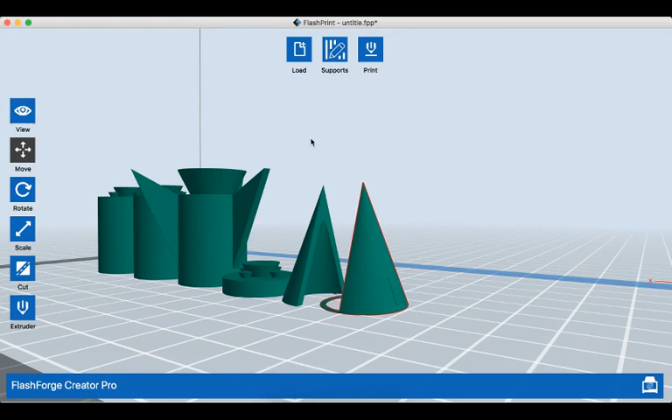In this video, I will go over how to prepare a 3D model to be 3D printed.

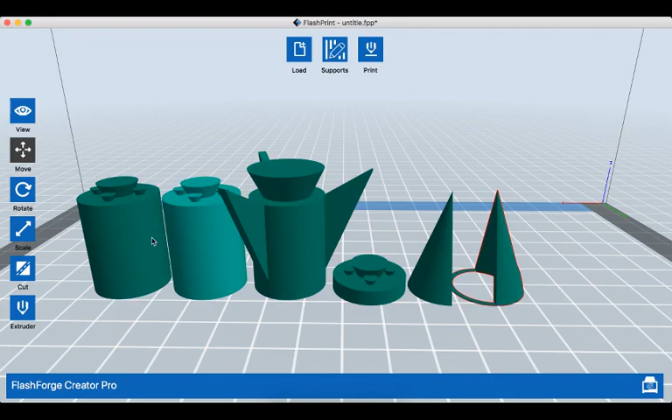So here I have this example from a student. The rocket that this person made, they have everything prepared on one scene. Usually, to be on the safe side, I have them separately, but in this case, because everything was fine, this printed out really well actually.

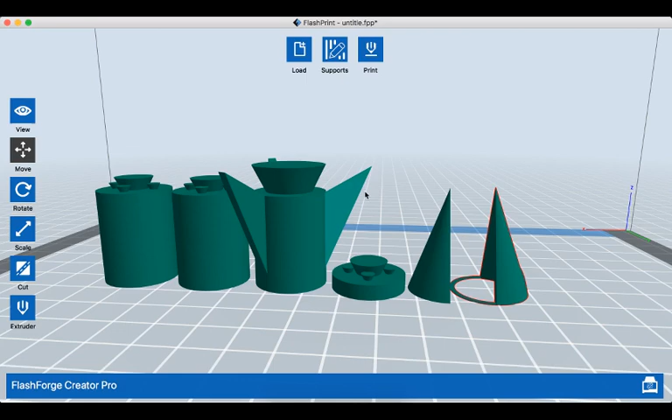Normally, something like this wing would require support, because it prints from the bottom going up, and as it prints it will fall or break off or tip over, since it has nothing below it to support it. If it's just printing something like this, it supports itself, so there's no need to build supports. But because these are at such an angle, it doesn't require any support. So something like this is fine.

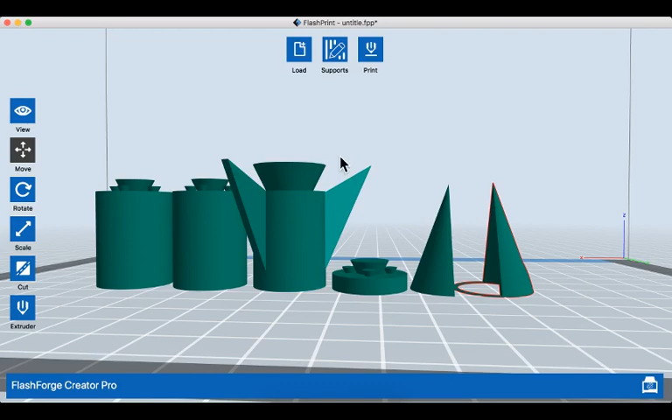But if it was coming out straight across like this, then it would require some supports. That applies to this as well - the inside of this front part, because it's at such an angle, it also doesn't need any supports.

And if I go to Edit, Select All - the reason I do select all is because whenever I mouse over something, since these are separate objects, this 3D printing software, FlashPrint, treats them as separate objects. So if I wanted to print the whole thing, I'd need to select every single individual piece. But that's too much of a hassle, so I can just go to Edit, Select All, and then whatever I do applies to everything.

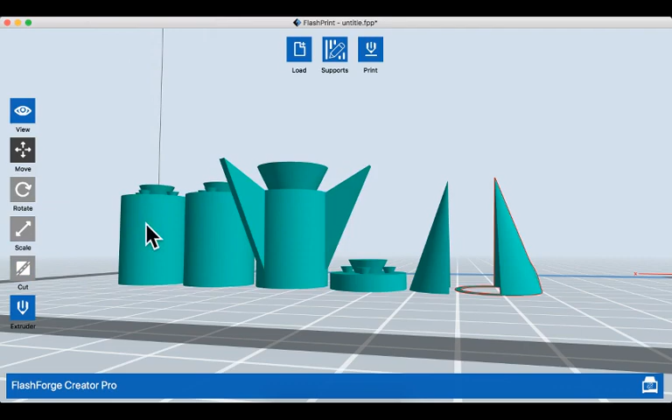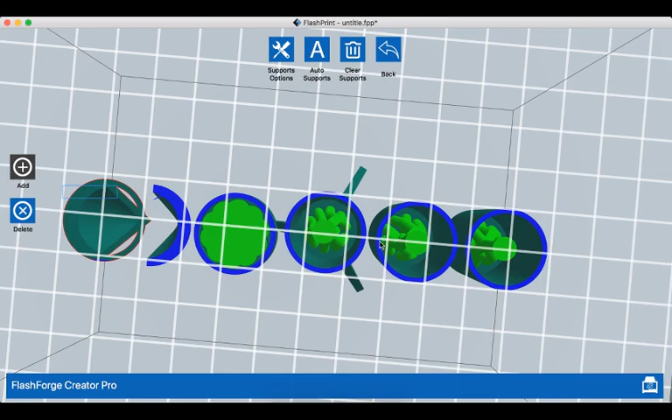So if I go to Supports, Auto Support, yes, and down here at the bottom - so if I rotate, I can see that there are no supports. None were created, well, inside there, but in this case these are not needed, just because this structure is a very basic structure and it never fails, so there's no need to have supports.

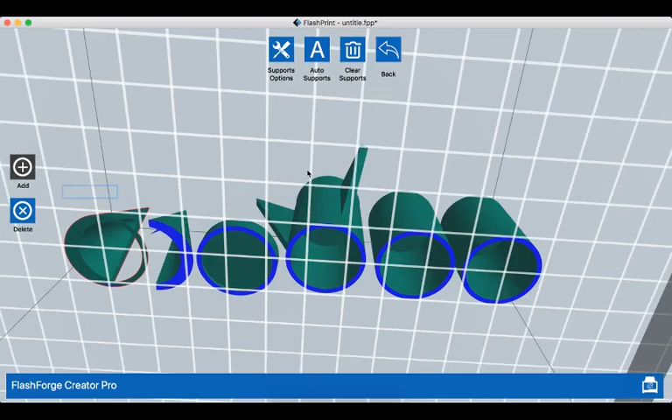So if you build supports and you get something like this, well, you can just clear them. It's okay, especially because the inside - we don't really care what's on the inside. So to save material, to save time, we don't need any supports.

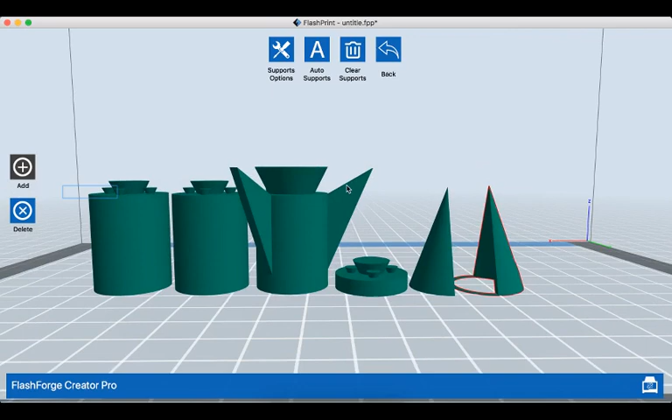But if for some reason errors happen, I would recommend just printing one piece at a time. And if you still get errors, then go ahead and use the supports. But in this case, I would not use supports just because these cylinders are fine for printing as is. I would only worry about these things. But if auto supports, like we just saw, nothing happens, so that's fine.

So anyways, what I'm going to do is bring in a different model. Let's say I'm done printing this and I want to start something from scratch. I'm just going to go to File, New Project. I can save it if I want, but in this case I'm not.

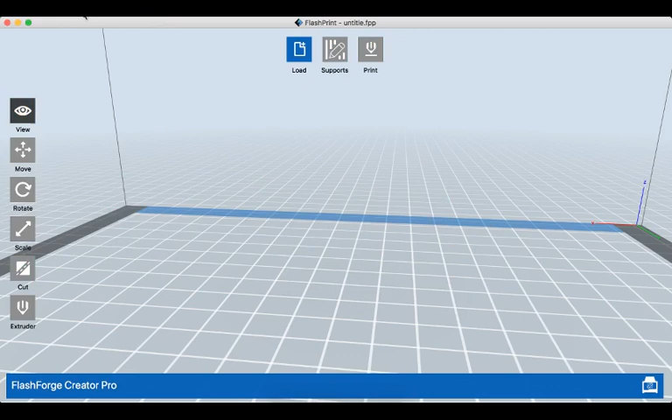Let's go to File - whoops, I want to go to Load. And then in the window, I'm going to go to No Name, because that is the name of the SD card. It's a mess right now, but what I'm going to do is go to something that was done recently. Maybe I'll go here, and then choose.

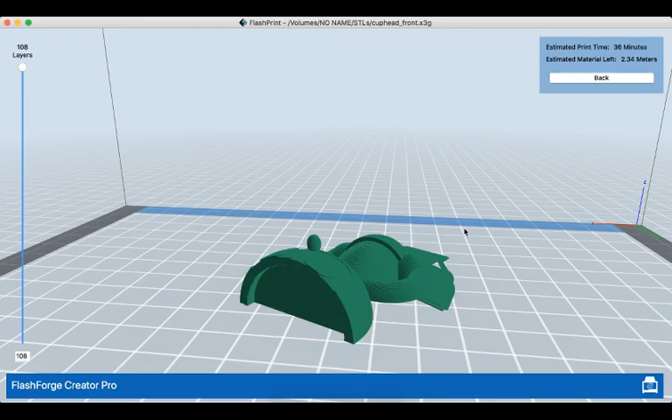Okay, I'll do the Cuphead. So one thing is this X3G file - this is actually the file that's generated for the 3D printer, the file format created by the software for the 3D printing software, to be used for the printer. So if I try to open it, here I have this, and here's the actual model that's ready to be 3D printed.

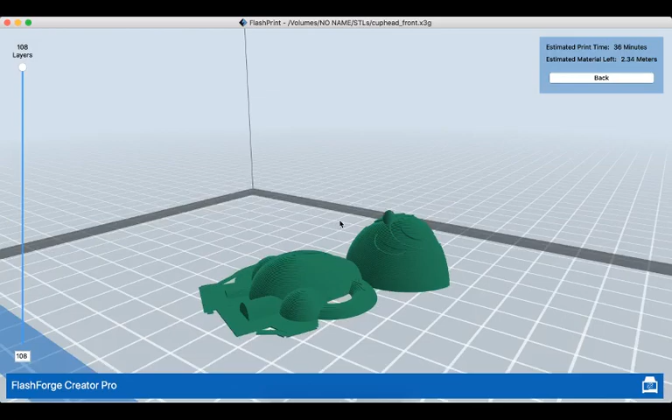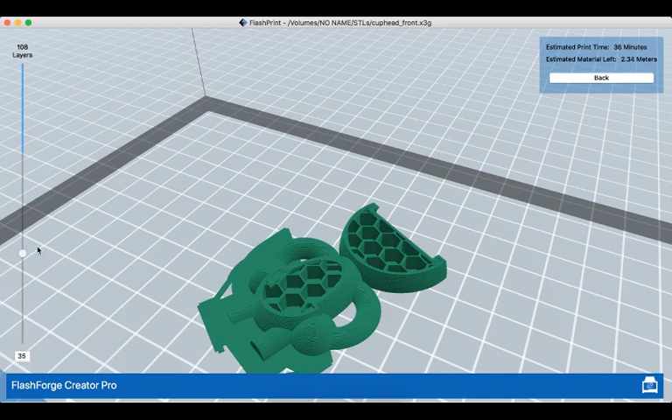This was sliced in half, so that the front part gets printed and the back part gets printed. Whatever's under here is going to look kind of ugly, but that's not going to be seen because it's just going to be glued from this part, the bottom part, to the other side. But anyways, here I can see the estimated time and how much material, and I can click and drag on the slider and it shows me how it's going to be printed. So it starts from here and goes up like this and all that stuff. So it comes out fine.

If I click on back, I have nothing, which is kind of weird sometimes, but that's fine. I just wanted to show that part. But when you want to start from scratch and you don't have anything, you just finished modeling something, you don't want to bring this in because that's what the file is for the 3D printer.

But we want to bring in the STLs or this file, which I've never seen, but this seems to be the file format. Oh, 3MF, that is the file format, the default file format from the 3D printer. So even that file works with this.

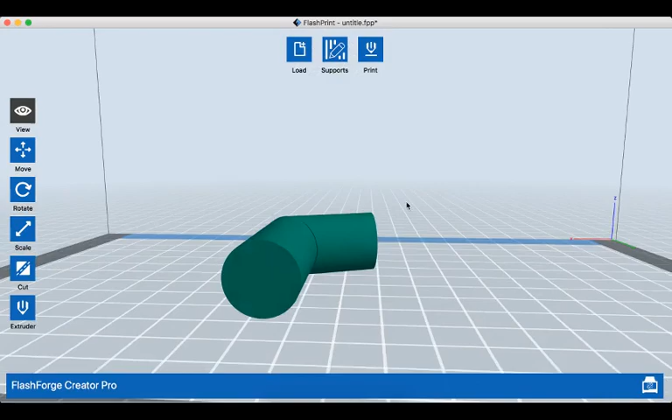So what I'm going to do is bring one of these instead. I'll bring in... okay, I'll go with this one. So I'm going to open up the 3MF, and here is this. So this is supposed to be the arm for the character. I would rather bring in a file that's much better.

Jeez. First of all, these names are... I highly recommend that the kids name their files properly, and by that I mean with their name on it, first name, then a space, and then whatever it is. Adding something like this is just gonna be confusing, and the last thing I want to do is deal with random names that have nothing to do with what it is. So I highly emphasize that part, and this kid obviously didn't follow.

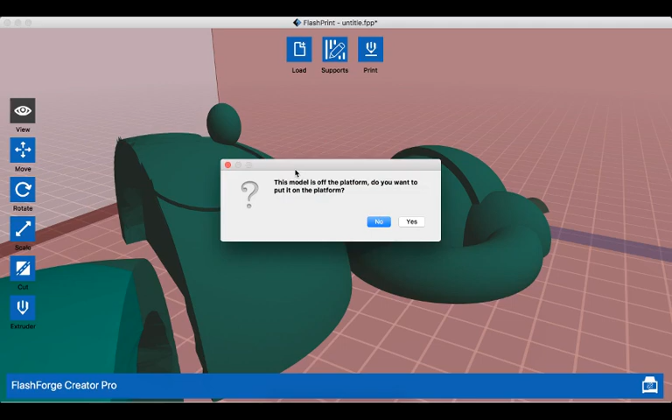So let's see, I'll go with this one, whatever this is. Okay, cool. So most of the time you'll get this message, it's off the platform, that's fine. Just click yes, and we get this. Now this is the file. There's the front and then the back.

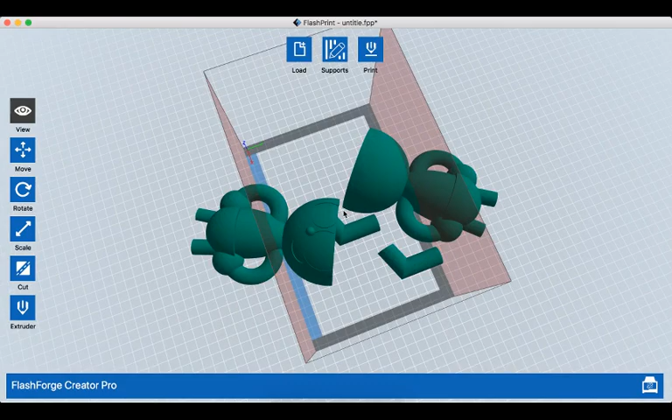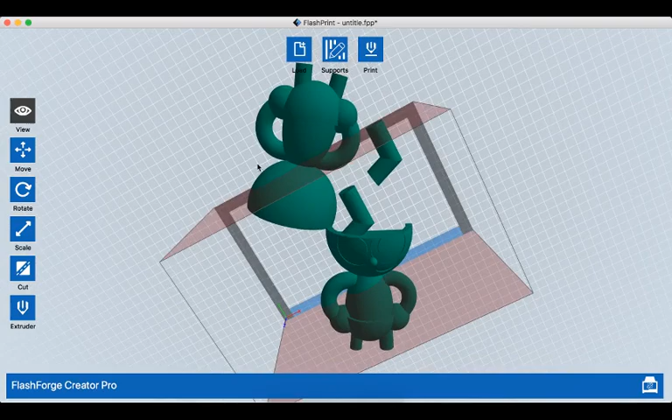Obviously it's not going to fit inside the 3D printer, so ideally you would want to separate them like this kid did, but I cannot select the model and delete it because when I click on one, it selects both sides. This and this are separate for some reason, but this is connected to all of these. That's fine, but this is something you can easily fix in 3D Builder. Just delete everything but leave one object, save it as a separate object, and then do the rest for the other things. But anyways, let's say I was going to use this.

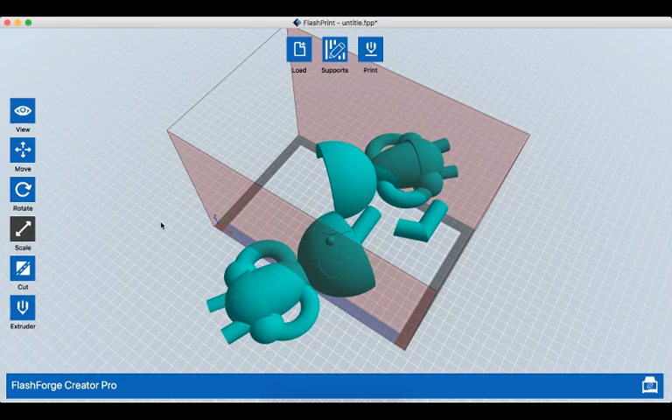Well, what I would do is go to Scale with everything selected. I don't have this selected, so I need to select all. And then go to Scale, click it again, and you can just click the down arrow or type in a number, but I prefer to do it like this, that way I can see. There, so now this will fit. I can also left click and drag on the outside, whatever works for you.

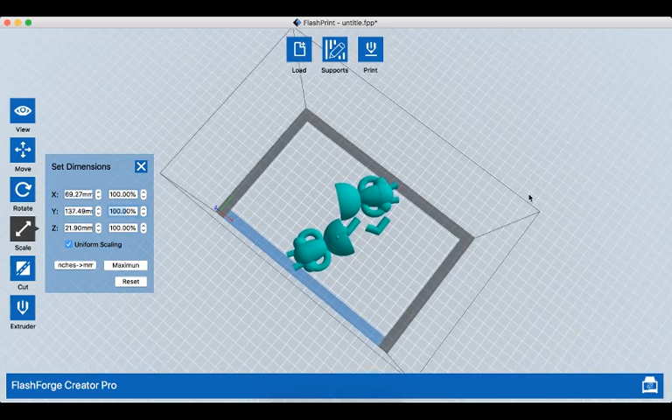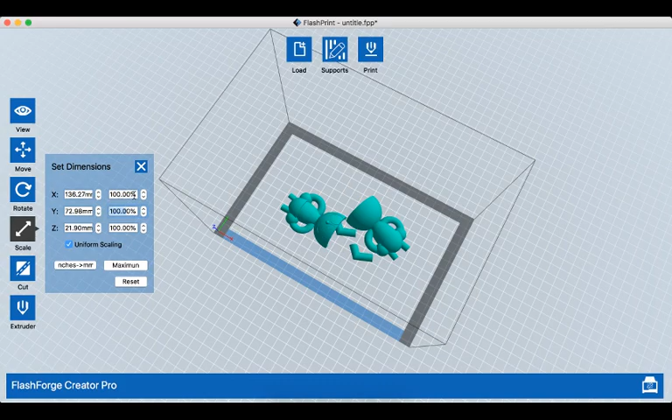So now that I have that, I can also maximize this, the build area, by rotating this. So I'm just going to rotate it this direction, and then if I want, I can go ahead and make this bigger. But one problem I'm not a fan of is now it reset the values, so obviously this isn't 100% of the original size, but it's just something you have to kind of deal with.

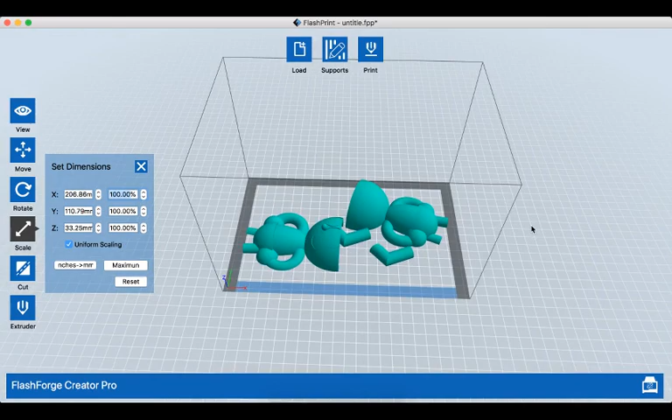Obviously the bigger the model, the more time it's going to take to 3D print. My general rule is if a kid takes 5-10 minutes to model something, I'm not going to print a 2-hour-long model or print job for that kid. That's not what I do, that's not how I work when it comes to this. Just because you run the risk of having problems, errors, or glitches after an hour of printing, and you have to redo it again, and it's just too much, especially with a large class.

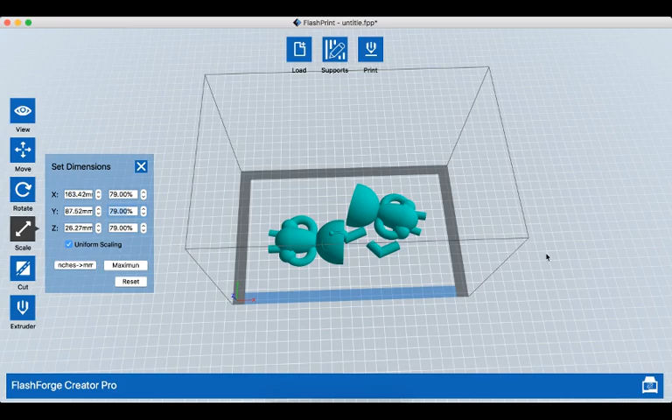But if a kid really does a good job, took their time, was always listening, all that stuff, then I don't mind printing something bigger or spending more time with that. But let's say that I was going to print this.

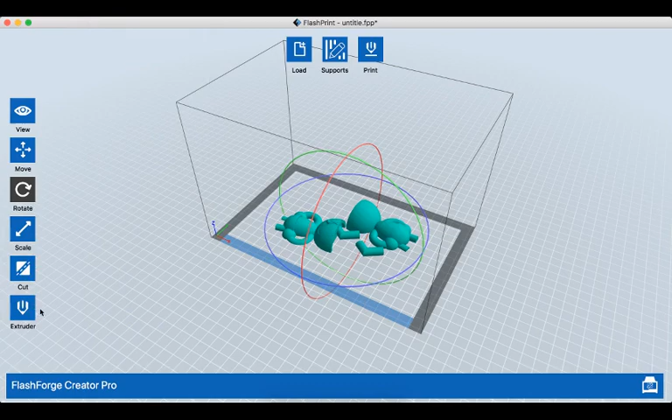So, okay, everything's set. What I got to do, just to make sure, select all. Everything's selected. I'm going to go to extruder. The 3D printer has two different nozzles. We're using the one on the left. Currently the one on the right is clogged. That's fine, the one on the left is fine anyways.

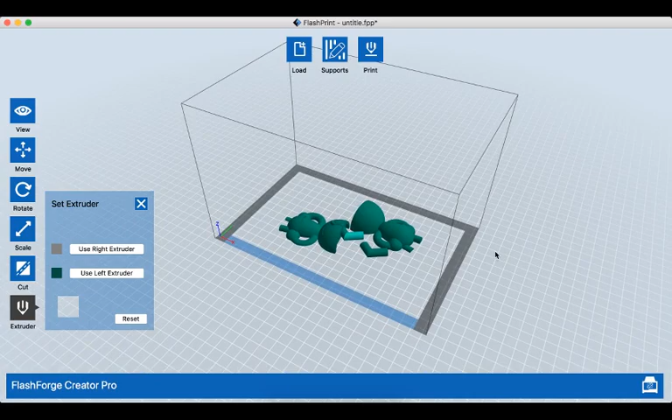So here these are color coded. If I select the right one, it's going to change the whole thing to this color. But if I click on the left one, the whole thing changes to this color. Now if I only had, say, this selected, just this piece, and I click on the right, well, now that is going to be printed with this extruder. I don't want that, I want everything to be from just one. So that's what I'll do.

The other thing is, let me close this. I'm going to go to edit, select all, go to supports, and for the most part I just do auto supports. In this case, there's no need for supports. This is fine.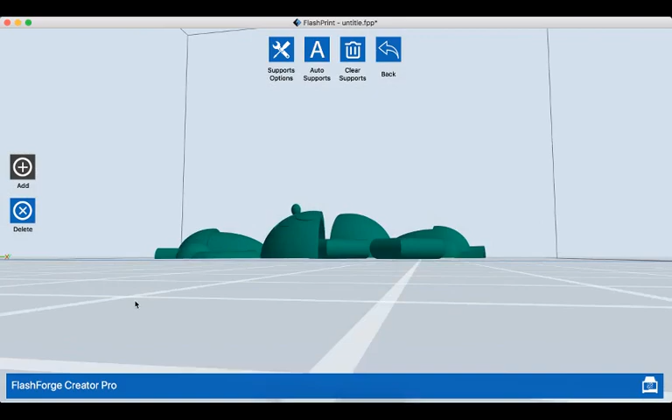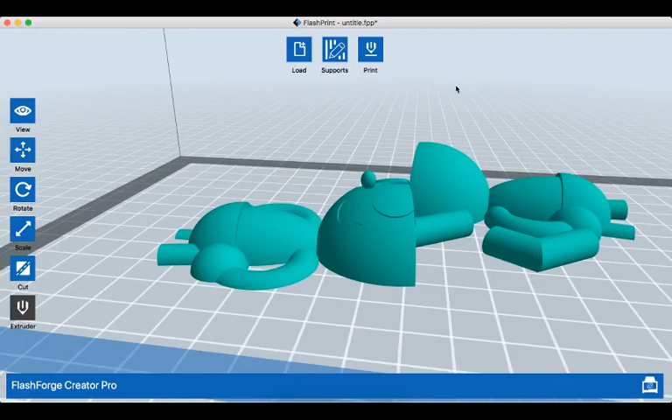Hopefully everything is leveled and on the floor. If anything is floating, you'd fix that in 3D Builder. Those are the simple basic things kids need to check beforehand, but there's always that one kid that doesn't, so make sure that's checked.

So everything's ready to be printed. I'm going to go to print. Since it's on the left one, this is already set to PLA, so there's no need to change anything here. All you got to change is this right here for the temperature. If you don't see this, you got to click on more options.

I tend to go with 70. Some prefer 90. 70 has worked for me, so that's what I stick with.

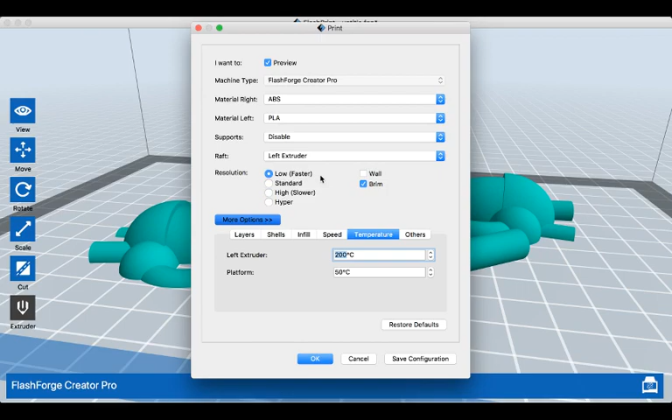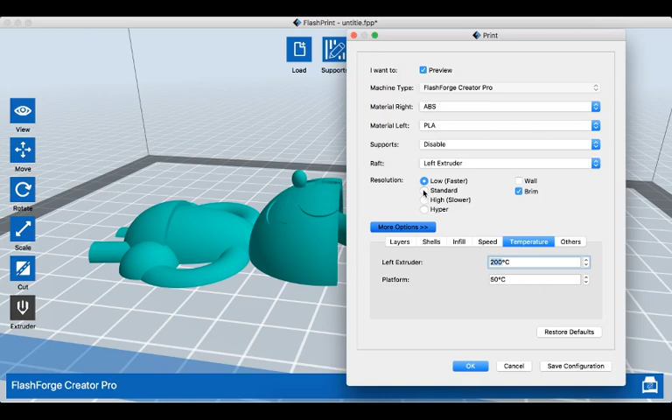Another thing you need to do is change this to low for a faster print job. For a character, obviously the higher the better, but if it's going to take 6 hours to print, that's not a good idea. So I tend to go with low, or even standard sometimes, but low is fine. It's up to you though. If the kid's done a good job, then standard or even high would be fine. But anything higher than 3 hours, even 2 hours, is not something I like to do, so I tend to stick with this.

Supports, leave this. If supports are applied, then supports will be printed from the left extruder.

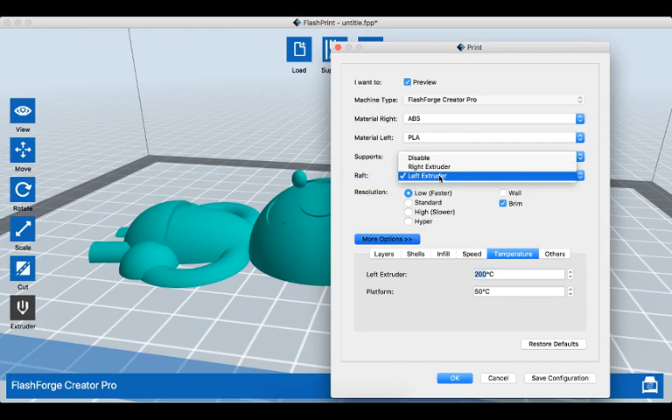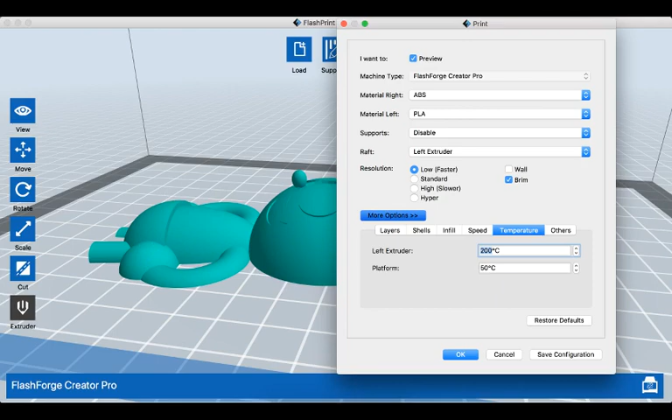The other thing are rafts. Rafts will create, I believe, a thin floor for the model to be printed on. I tend to just leave it at this. If I can do it without it, I don't, but the big thing about rafts is that it keeps models from moving around while printing, which I've had problems with. Maybe 30 or 50 minutes into the print job, the model will just unstick from the printer bed and move around. So I tend to leave rafts on.

If I go over here, these things I just leave as is. Hexagons, they're good, a mix between a very strong interior and a weak interior. Lines would be weak, triangle would be super strong, and hexagons is kind of like a middle ground. It's good enough. But if you just mouse over, it does tell you what it does.

Oh, I had it wrong, hexagon is actually the highest strength. Okay, well it's kind of right. I tend to go with hexagon just because it's good and durable.

There is no right extruder, so we're not bothering with that. Speed, this is fine. Again, temperature—one thing, earlier I changed to 70, but because I changed these resolutions, if I go to high for example, it goes back to 50, the default. So you want to make sure that before you type anything, you first click here and then change it. That's one thing to watch out for. So pretty much all you got to change is just this to 70.

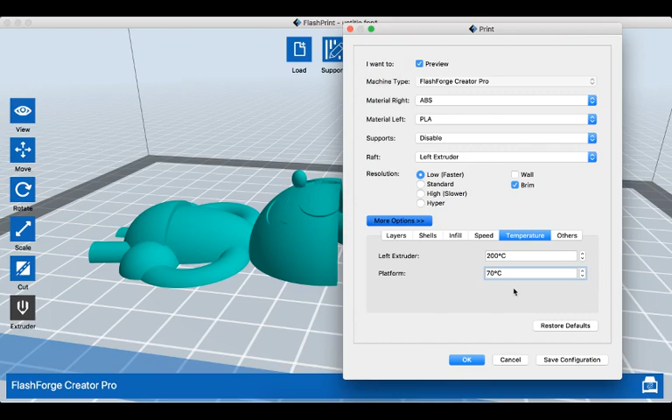So that's pretty much it. You could use the config, but I don't. I like to do this manually just to make sure. Then you would just click OK.

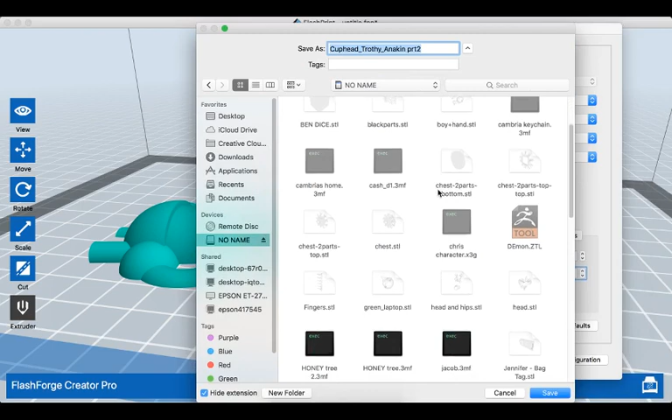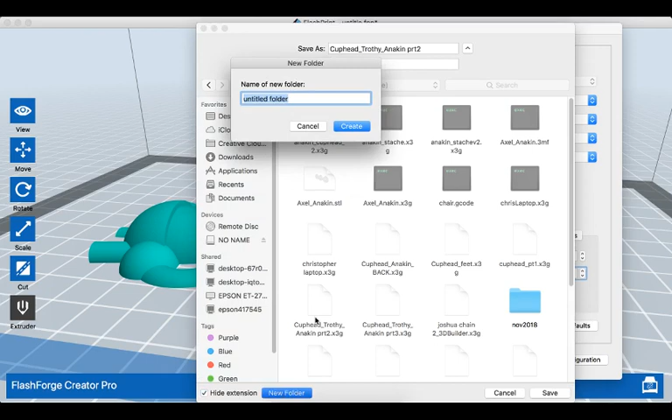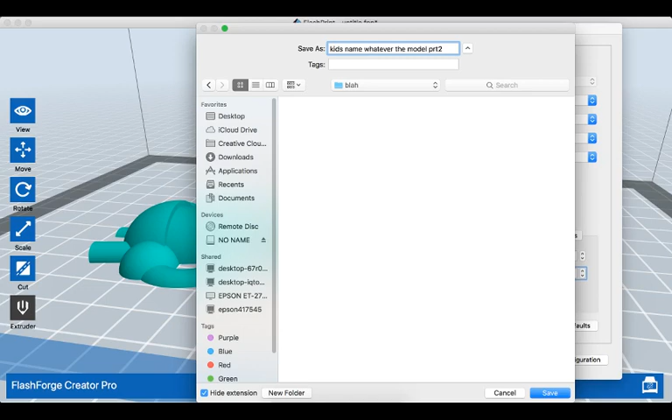You would designate the destination to be saved to. If I go to the root of the SD card, it doesn't really matter, but I go to the PLA orange folder because that's the material, and these are the different files I need to clean up or delete now. But you can always make a new folder if you need to. Here it is, and then save it in there. Give it a simple name, the kid's name, underscore or just a space, whatever you want, and then whatever the model is, and then just click save.

It's too long—okay, yes. So there is a limit to how long the file name could be.

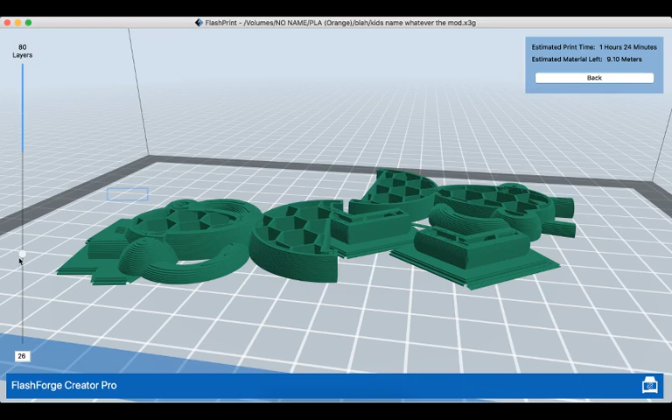So there it is, it's done, and it's going to tell me how long this will take—an hour and a half practically—and how much material is left. If I click and drag on the slider, I can see how it's going to come out, here's those rafts. Sometimes rafts are helpful, sometimes they're not, it just depends on the model. But yeah, that's how you 3D print stuff.